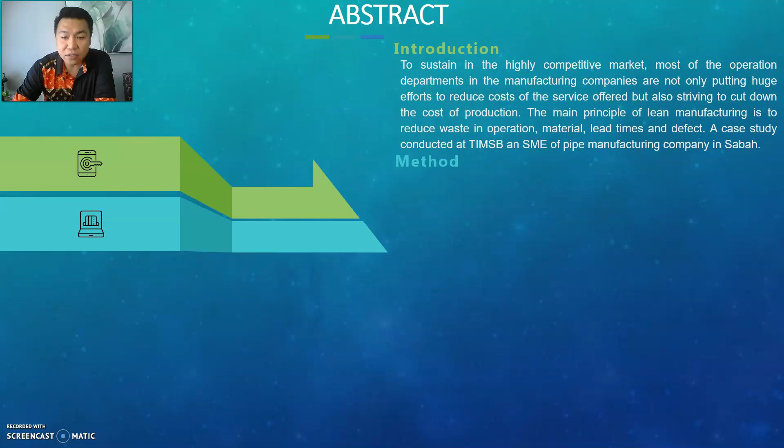In order to visually display where waste occurs in the process, a value stream map (VSM) is drawn. VSM is a direct observation of the process of information and material flow as they currently occur, summarizing them visually and then envisioning a future state with much better performance. This study focused on one of the product families. Five value-added activities, eight necessary but non-value-added activities, and a non-value-added activity were identified.

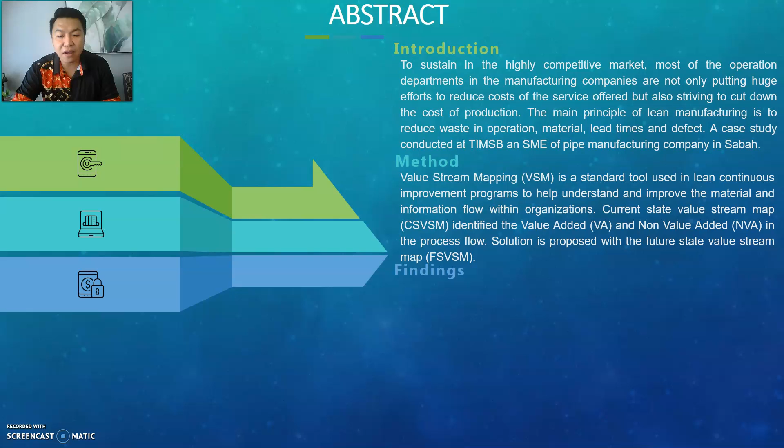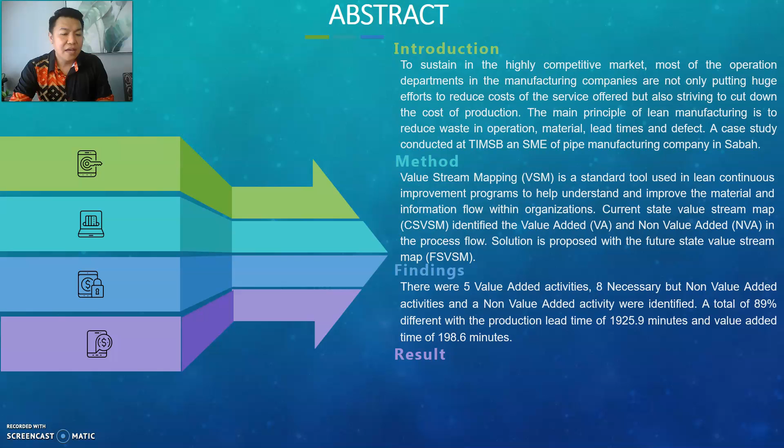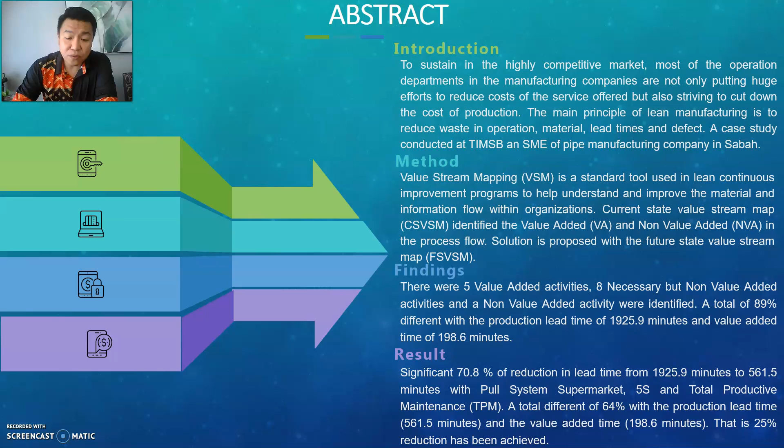A total of 89% difference with a production lead time of 1,925.9 minutes and value added time of 198.6 minutes. A significant 70.8% reduction in lead time from 1,925.9 minutes to 561.5 minutes with the introduction of a pull system supermarket, 5S, and total productive maintenance.

A total difference of 64% with a production lead time of 561.5 minutes and the value added time remaining at 198.6 minutes. That is, a 25% reduction has been achieved.

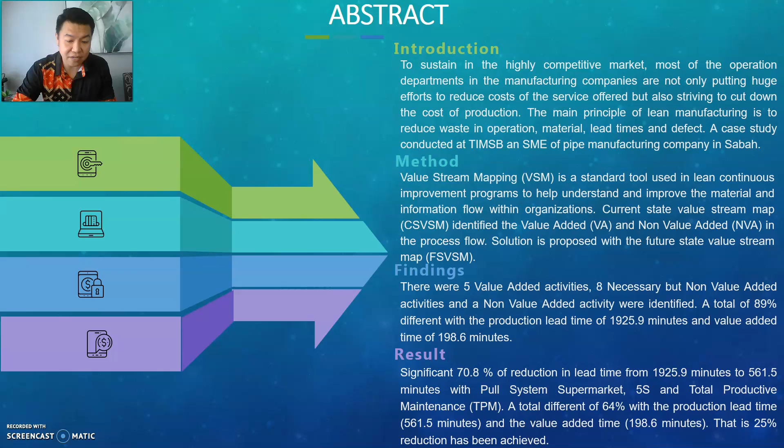With this rapid growth of sales, manufacturing sectors nevertheless are expected to be able to keep pace with technological progress in order to remain strong in the global market. As stated by the Small and Medium Enterprise Corporation Malaysia in 2007, the challenges faced by SMEs in light of the changing global market are the ability to compete globally, move up the value chain, and embrace ICT and e-commerce. These challenges are actually closely interlinked.

In order to compete on the basis of quality, cost, reliability, and speedy delivery in the global market, SMEs must reap economies of scale. Therefore, the researcher is interested to examine the potential of VSM as a tool to improve the quality of the production process in manufacturing industries of SMEs in Sabah. VSM is one of the tools in lean manufacturing that is said to be a proven approach for success in manufacturing industries. It is also widely used by the manufacturing industry to identify and eliminate waste, improve production time, and reduce production costs.

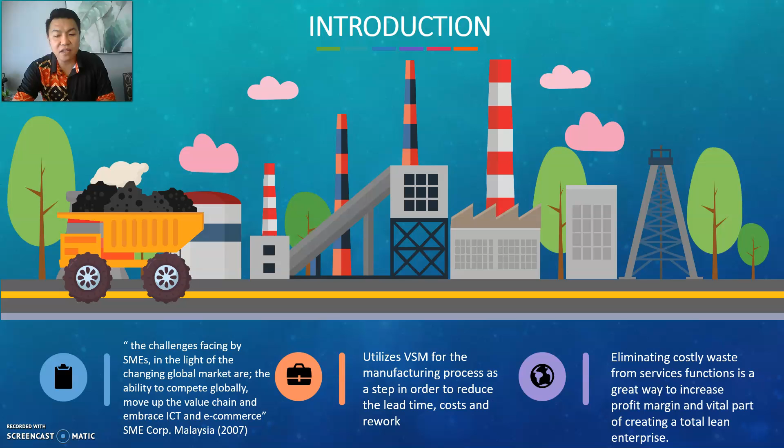Even though lean manufacturing is a proven approach for success in manufacturing industries, in the case of SMEs in Sabah, the use of VSM to improve production processes is very rare. Therefore, this study is hoped to be a benchmark for future studies in using VSM as a tool to implement lean manufacturing.

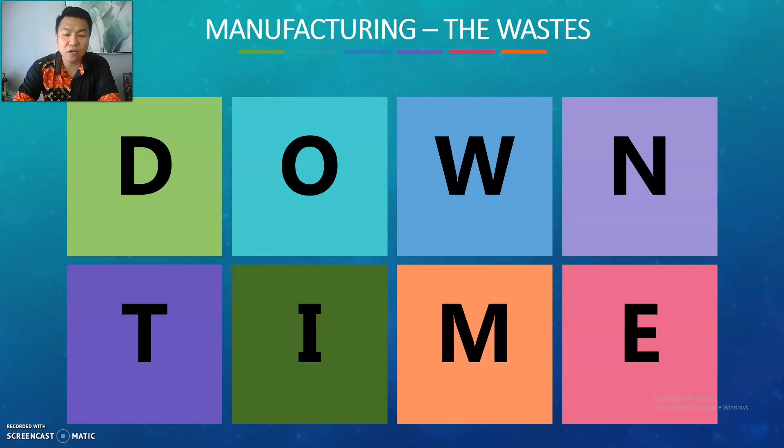Downtime in manufacturing is defined as any period of time when a machine is not in production. The total amount of downtime a factory experiences includes any stops during production that cause a loss of revenue for the company. So what are these wastes referred to? Let me explain briefly through this abbreviation. Defects. Producing defective parts or products will result in rework, scrap, replacement production, and invariably add significantly to manufacturing costs.

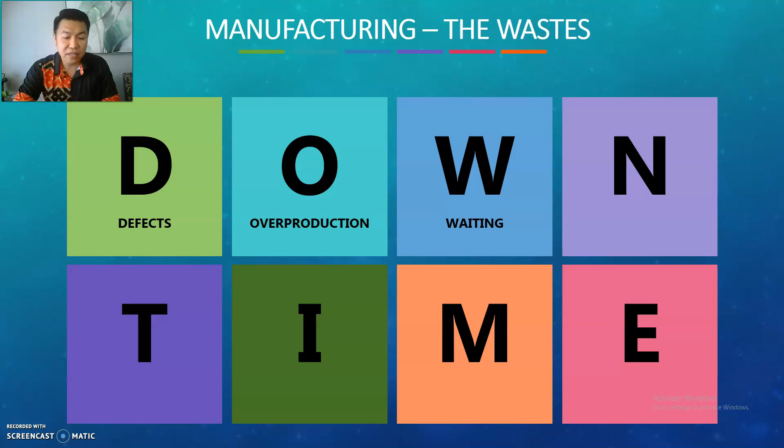Overproduction means producing more and faster than needed. Waiting. Waiting time is an idle time that is produced when two dependent variables are not fully synchronized. Non-utilized talent is not effectively or not at all utilizing a valuable resource, that is, the employees. Transportation occurs when people, product, equipment or information move too often or further than needed.

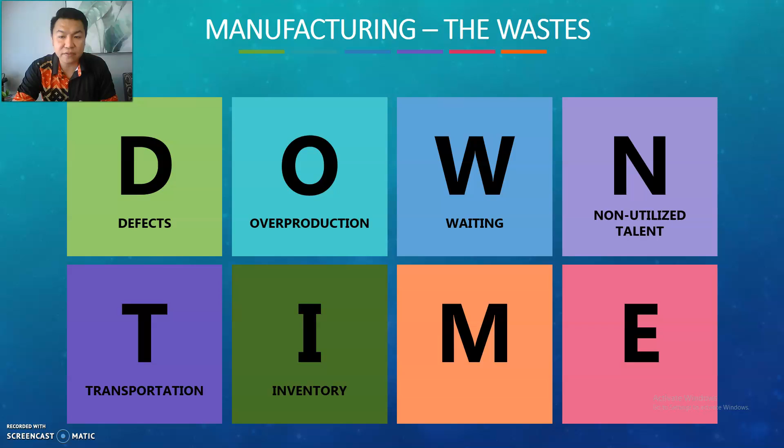Inventory can be defined as any supply in excess of process requirements necessary to produce goods or services just in time. Motion is any movement of people which does not contribute added value to the product or service. Overprocessing can be defined as an effort which adds no value to the product or service.

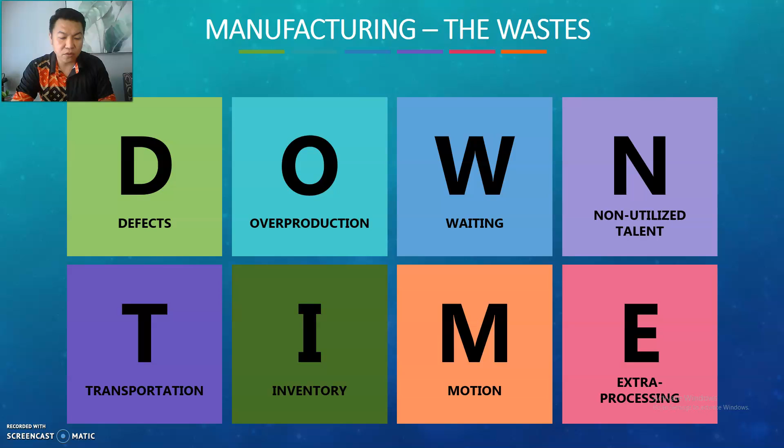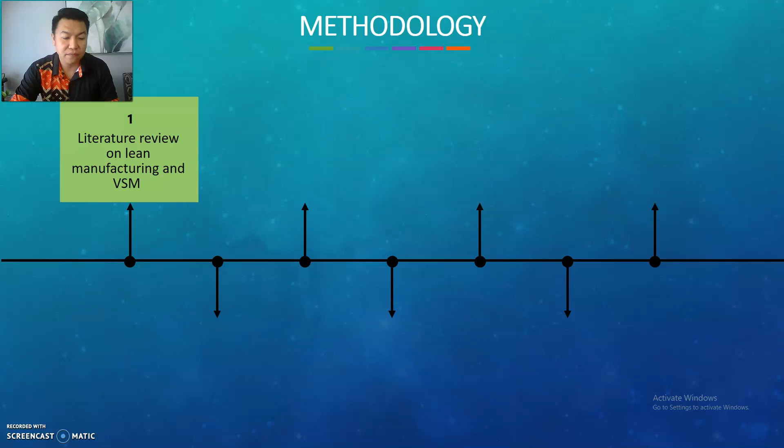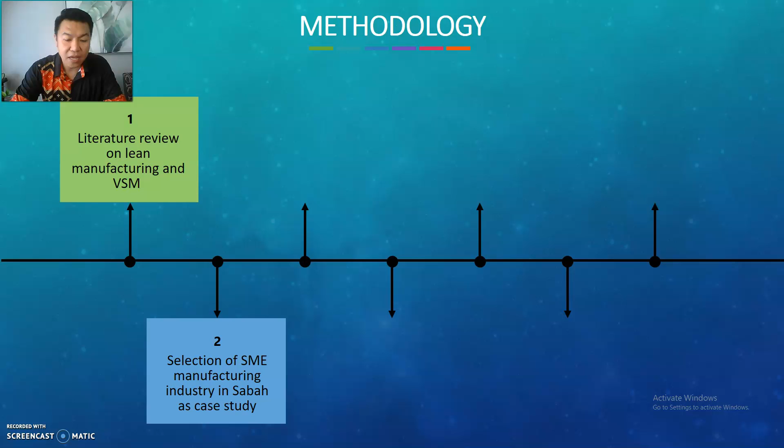This study starts with the literature review on lean manufacturing and the use of value stream mapping as a lean tool to eliminate waste. This is followed by the selection of a suitable manufacturing organization to carry out the implementation study. Thus, TIMSB has been chosen as the site of study. Upon receiving approval to conduct the study from TIMSB, using research instruments of observation, document reviews, and interviews, the researcher conducted a case study at the site.

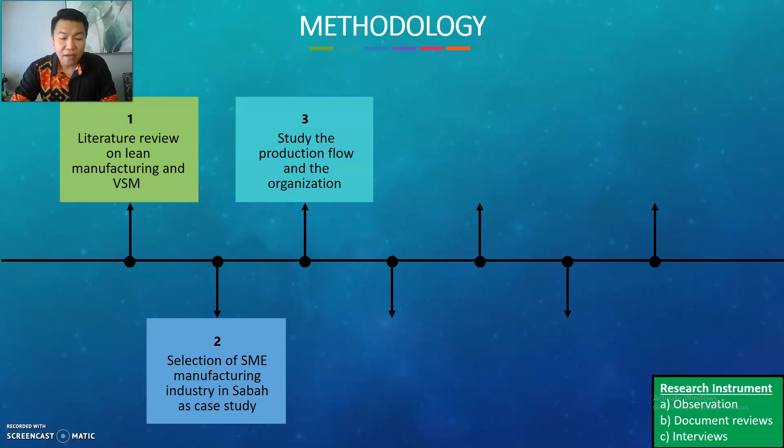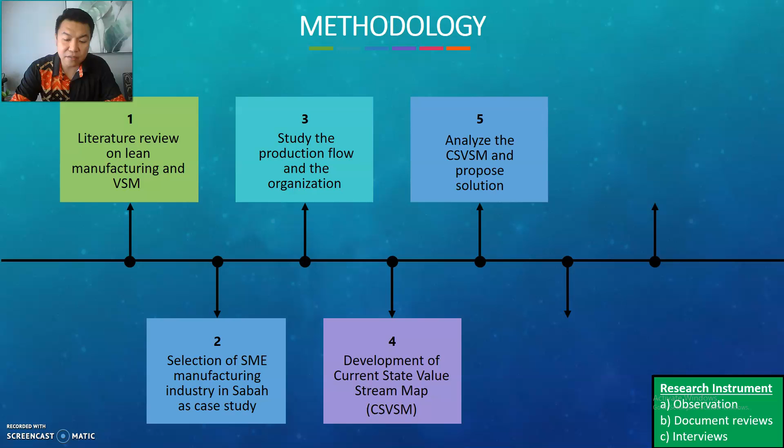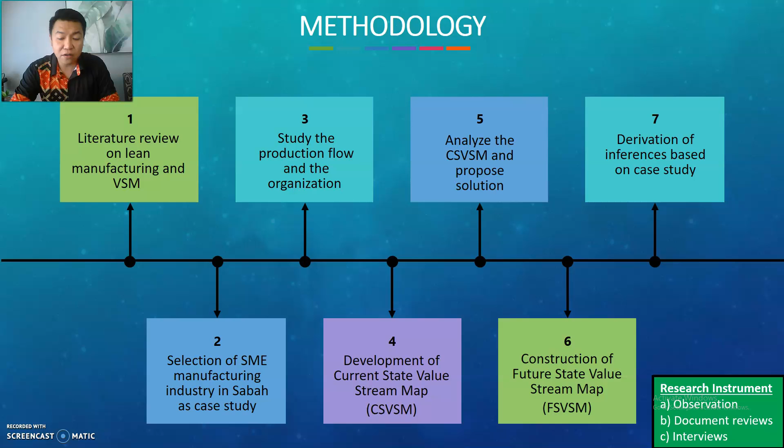The researcher studied the existing products and processes followed by the organization and collected the production data for the development of the current state map. Next, the researcher analyzed the data collected from the current state map in order to derive a proposal for the future state map. The researcher constructed the future state map, and finally, the derivation of inferences based on the conducted case study.

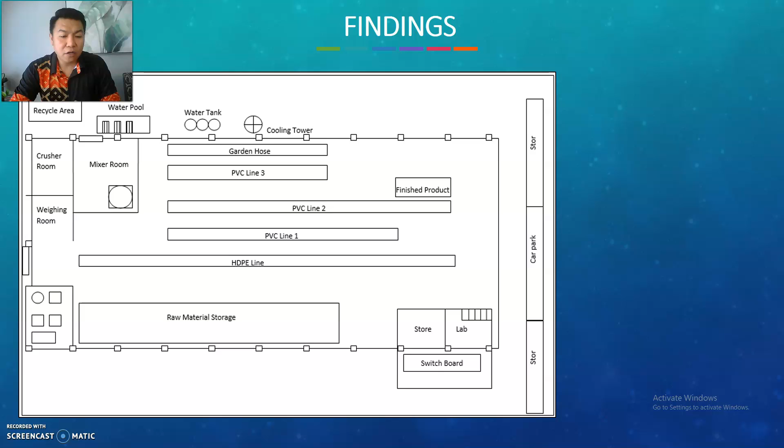Based on the observation during the first week factory visit, TIMSB has 5 groups of production lines which vary from the type of production and diameter range. The location for all production lines are shown in Figure 1. This is the TIMSB production floor plan.

The first 3 lines produce unplasticized polyvinyl chloride or UPVC pipes, whereby line 1 is within diameter range from 15 mm to 110 mm, line 2 within diameter range from 80 mm to 250 mm, line 3 within range from 15 mm to 50 mm.

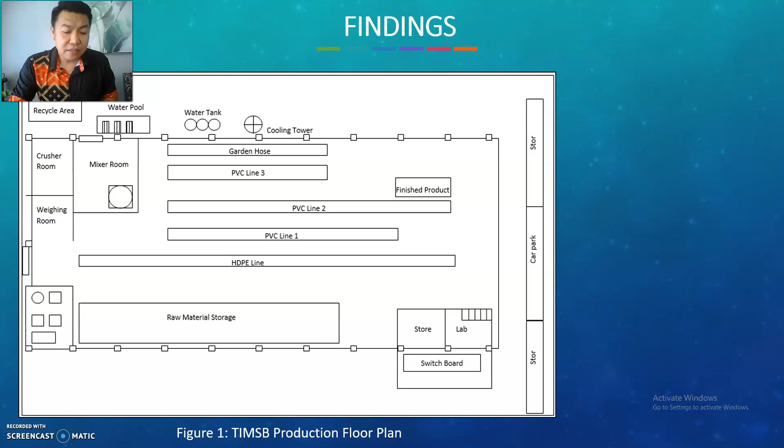On the remainder lines, line 4 only produces HDPE within the diameter range of 20 mm to 250 mm, while line 5 only produces garden hose. This Figure 2 shows the summarization of TIMSB production flowcharts.

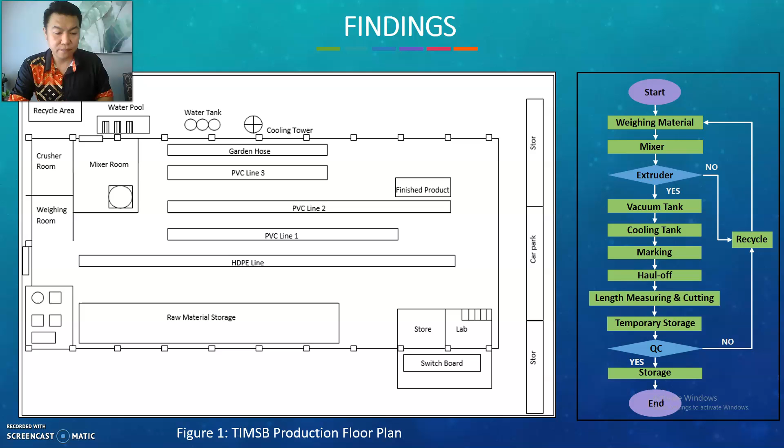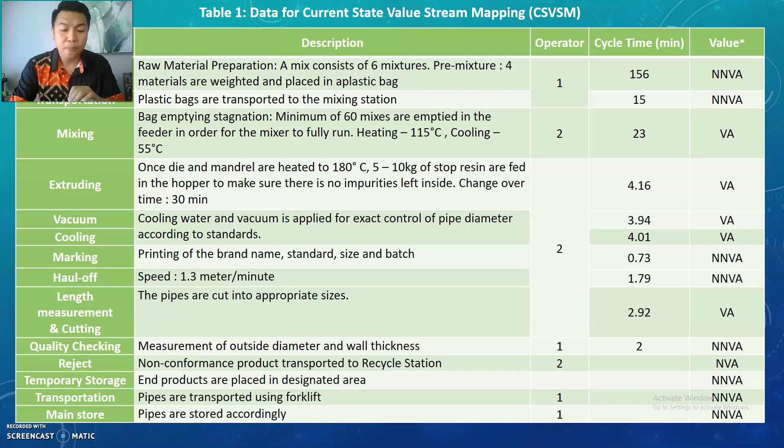The data collection for the material flow started at the production department towards the delivery, gathering snapshot data such as inventory levels before each process, process cycle times, numbers of operators, shifts and changeover times as summarized in Table 1.

Figure 3 shows the current state value stream map. It has been observed that significant scope for improvement is there, as a particular part waits for 1925.9 minutes, and the real value addition time is only 198.6 minutes. In summary, 5 value-added activities, 1 non-value-added activity, and 8 necessary but non-value-added activities were identified. There are 5 potential improvements that can be suggested from the current state value stream map.

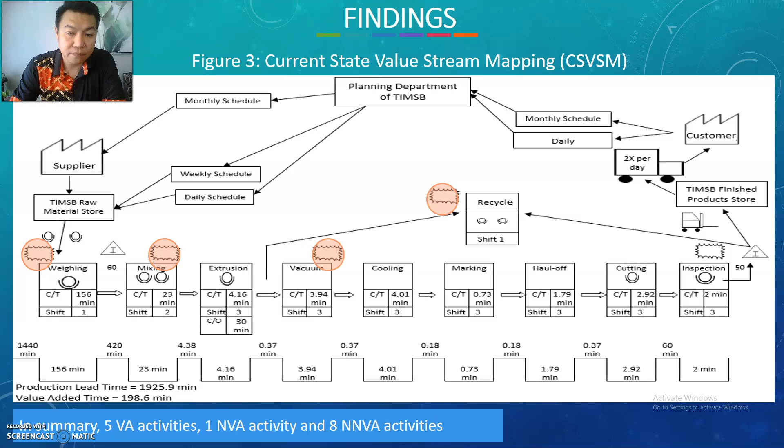The main reason of lean manufacturing is to support improving customer satisfaction all the way through the whole VSM. From the current state VSM, researchers found out that the inventory and lead time need to be addressed, as both are equivalent, to be reduced by identifying the suitable lean manufacturing tool and creating an ideal VSM. Figure 4 shows the future state value stream map.

From the analysis, researchers proposed 3 types of lean tools: the full system supermarket, 5S, and total productive maintenance. For the full system supermarket, researchers proposed to apply it in 3 stations, namely the weighing station, the mixing station, and the finished product store. As for 5S, it is applied to the weighing station, mixing station, recycle station, tool store and finished product storage. And finally, total productive maintenance is mainly for machineries, that is, the vacuum machine.

The full system supermarket is considered as the space allocated for storage of products that are ready for delivery, usually located at the end of the production process. The supermarket is introduced to make sure every product starts to flow rather than waiting for other material to be prepared in large amounts, which creates unnecessary inventory to the next station. Furthermore, it is able to create continuous flow by switching to other products, in essence to ensure no machine or operator is idle nor product is waiting.

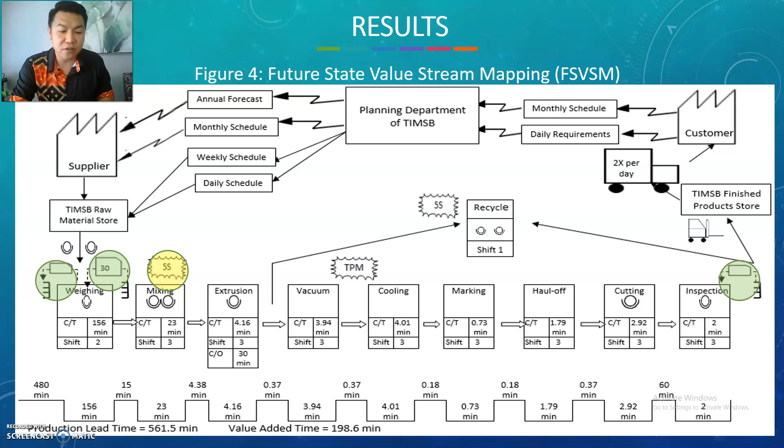The need of a 5S program is proposed for these particular areas. The initial start for this program would be the tool store, mixing station, and the recycle station. However, 5S does not endorse additional workers to the workstation, but instead requires existing workers to perform these tasks and utilize 5S practice as a habit in daily work. Taking pictures before and after performing 5S would motivate everyone for the improvement made throughout the process. Thereupon, the communication between workers and workstation is improved, subsequently increasing productivity and quality.

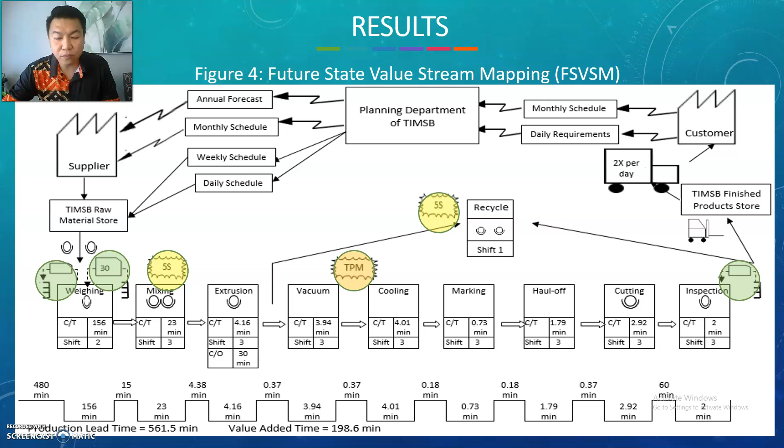Next, TIMSB will gradually eliminate any occurrence of abnormalities in the equipment conditions that are frequently ignored and delayed for an extended time. Furthermore, less failure frequency may improve machine uptime and reliability, plus reduce unnecessary overhauls which involve costs. After all, changing to a total productive maintenance environment can significantly reduce random machine breakdowns and in turn inventory and lead time. Simple visual monitoring would directly improve the availability of the machine.

Overall, the researcher managed to show the benefits of implementing VSM as an effective tool to improve production times and process in TIMSB. Table 2 shows the lean tools solution proposed in TIMSB. The study concludes with significant findings, about 70.8% reduction in lead time, from 1,925.9 minutes to 561.5 minutes, with the introduction of the full system supermarket, 5S, and total productive maintenance.